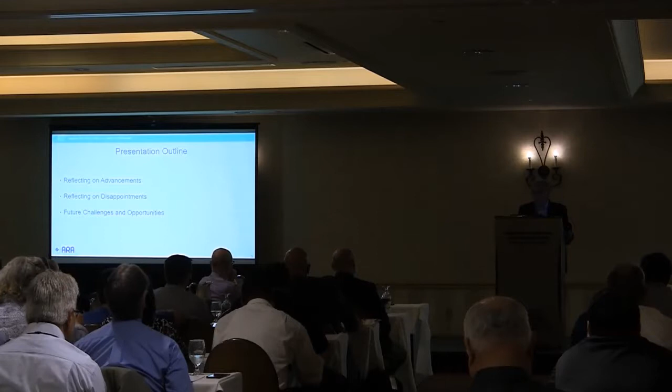I'm going to hit a couple of topics, and Henry has introduced me in previous presentations over some odd 40 years of association. I tend to chastise the profession as we go along here, so I've tried to soften that chastising a bit by referring to it as future challenges. And there's a little bit of disappointment I'll share with you. Don't take it personal, any of you. It's not intended to be personal to this audience or any individual. So we'll talk about my career, and this is my view of the world.

I'm going to reflect on advancements in geotechnical practice. That'll be the bulk of the discussion in my time that's allocated today. I'll talk about some disappointments. You'll see some repetition in that as we go forward, some of the same bullets, because a disappointment presents a challenge to us as a profession, and we can move forward and do much better than we've done in the past, and those that are going to succeed us as we go along.

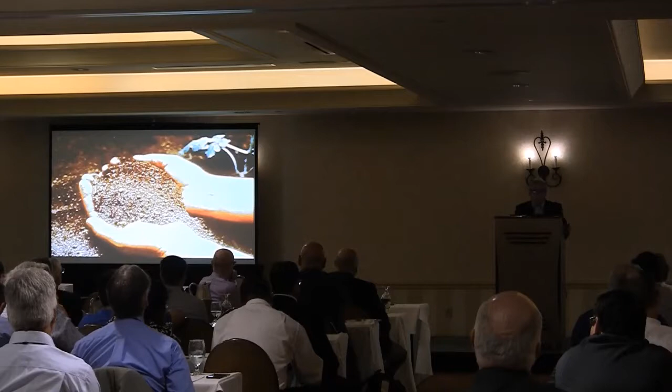In your wildest imagination, when you were growing up, perhaps some of you playing in dirt piles with little trucks and tractors, you probably never imagined that you would dedicate your career to working with geomaterials. Even as you graduated with a master's or a PhD degree, you probably did not fully appreciate that you were dealing with the most complex material on the face of the earth. And when I say material here, I'm referring to intermediate geomaterials, rock and soil. And there are many sub-definitions, as we all know in this audience.

You probably never thought about that. Two things. You never thought about dedicating a large part of your professional life and your personal life to this topic, and you never fully appreciated the complexity of the material that you were going to be dealing with. So as we go along here, we'll talk about some things as I reflect back from when I began working after graduate school in 1973 until the present, things that have changed and things that remain the same.

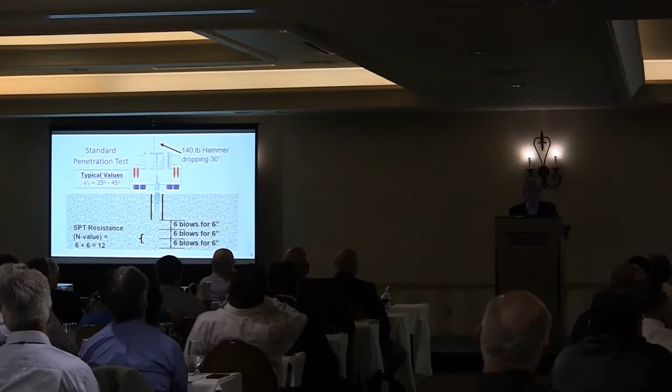If we go back to 1973, the mainstay geotechnical exploration tool was the standard penetration test, and as we well know, the standard penetration test is still well embedded into every geotechnical exploration that we undertake. Now, is that good or bad? I think as long as we fully appreciate, and in some cases, I have to admit, we don't, the limitations and the benefits of this tool, that's just fine. Of course, some things have come a long way that help us further investigate the underground.

Now, what's the negative side of this? I think often I catch myself, and I'm still quite active. I work usually, I'm told, about 70 hours a week, and my wife Barbara can attest to that. So I'm going to cut my time to 3/4 time, and our CEO and Board of Directors group told me that means I'm not going to work on Sunday afternoons anymore.

What I see in terms of in situ testing is I think we've forgotten that all of these tools have to be indexed to fundamental soil and rock mechanics, depending on the tool that we're talking about. And we sometimes see on projects, unfortunately, that these great tools are misinterpreted as being foundational tools. And I mean foundational not in the sense of a structural foundation.

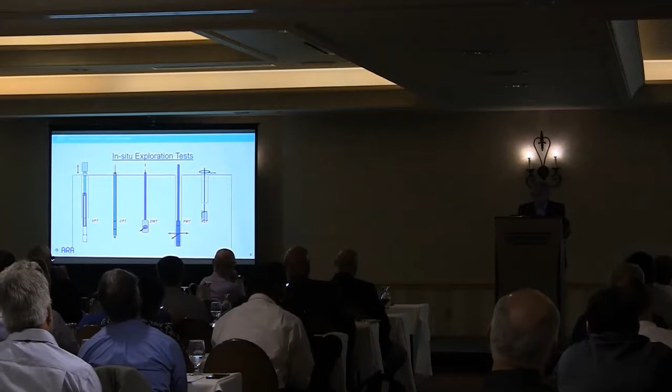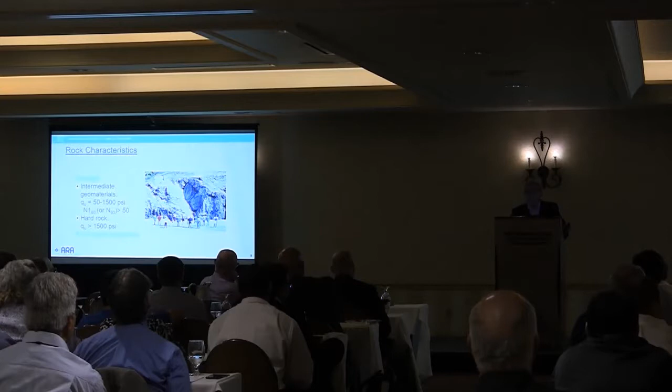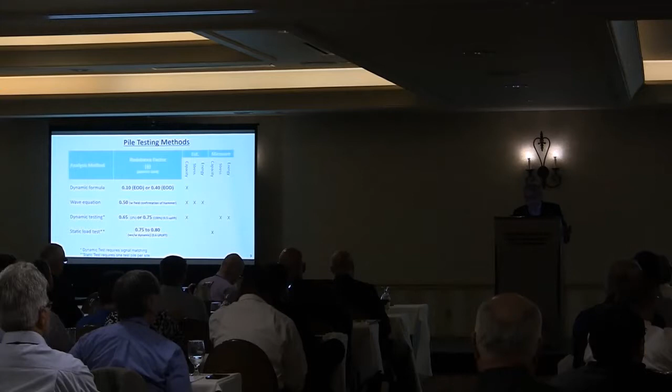In historical practice in civil engineering dating back hundreds of years, the focus of our designs was based on strength-based design of civil engineering features. It took us quite a while, if you think back to hundreds of years ago, and the evolution of beginning to have a conversation with our counterparts, the structural engineers, to speak intelligently about tolerable deformations, both in terms of horizontal and vertical elements.

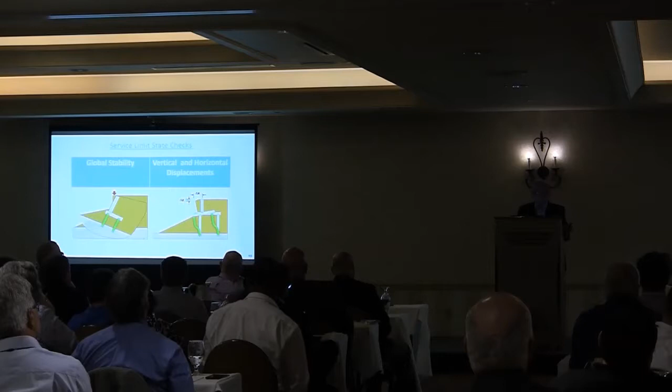So no longer today, some of you do not deal in the highway business per se, at least exclusively. Now today, using the AASHTO LRFD code, we can have an intelligent conversation, and in fact a very necessary conversation with our counterparts in the structural discipline, and say that some deformation, even on a deep foundation, is in fact necessary and appropriate so long as it's held to appropriate boundaries and the performance criteria of the particular feature that we're dealing with.

What has changed? So I'm kind of jumping topics here. If you're with me, you get the drift of this. What has changed? This is a Kentucky bridge. This is one of the Kentucky Lake bridges, which obviously no longer exists. This is one of the main spans.

Fortunately for the cabinet, and I had the luxury of being on one of the teams working on the new bridges, Kentucky Lake and Lake Barkley, the purpose of this slide, in terms of the emphasis that we now have to deal with, either by climate change or by whatever definition you choose, is the demands on our foundations for infrastructure features. By the way, I want you to remember, the only infrastructure feature that doesn't have a foundation is a boat. So anything we build has a foundation. We should be very proud of that as the geotechnical community.

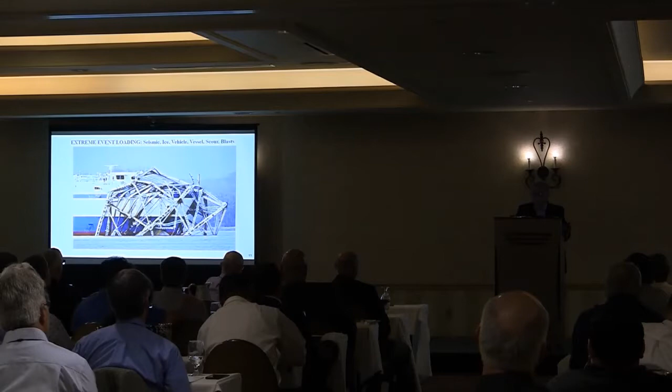Extreme events, for those of you who haven't dealt with this, can eat our lunch relative to controlling the foundation demands on a project. Some of you may be familiar with the Tappan Zee Bridge in upstate New York. Engineers estimate approximately a $4 billion bridge, one bridge, with $1 billion in the structural foundations, 25% of the total cost of the structure.

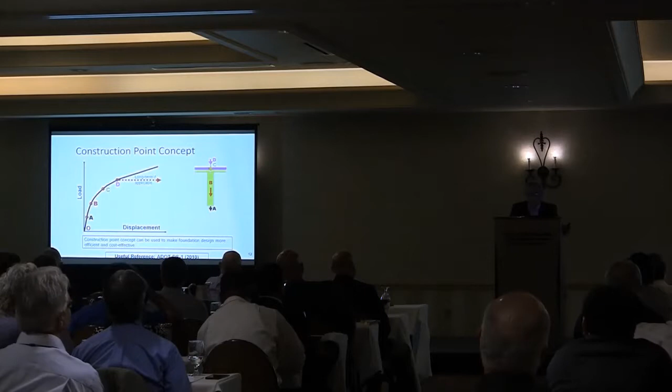Construction point concept. This might be a bit unfamiliar to you, and it's tied to the serviceability designs that I spoke about a little bit before. When we engage in conversations and do our computations from a geotechnical point of view for prediction of horizontal and vertical deformations and the associated times, it's important that we converse with the structural specialist, either on the building side or on the horizontal side of the business, the bridge side, and discuss the development of the deformations as the load is applied.

You see my little cartoon on the right here is a bridge pier, and the concept of this slide is when we have a discussion related to tolerable deformations, we should be speaking about what is acceptable from a post-construction performance criteria and not the total load that's applied to the foundation. In the case of a pier such as you see here, I don't really care what happens until I put load D on. And then I should engage in that conversation with the bridge specialist and say, what can we accept, 1 inch, 3/4 of an inch?

And oh, by the way, please, bridge engineer, don't tell me the Ballantine sign of 0 deformation. You old people know that Ballantine was not a scotch, it was a beer in New York City.

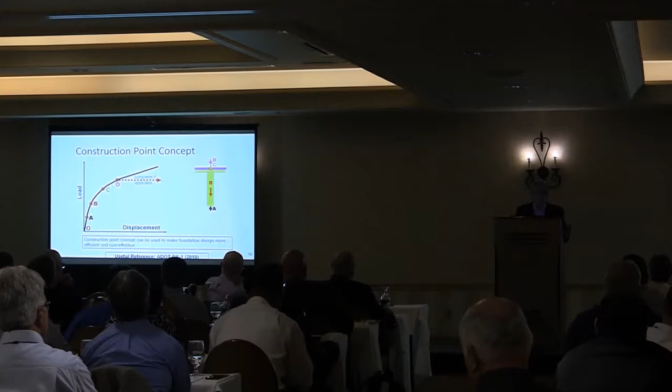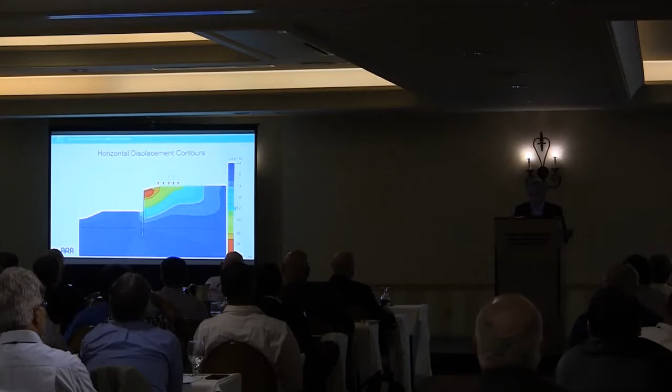Our computational methods have advanced tremendously. They even look pretty, such as this finite element analysis that's there just for eye candy. But a word of caution to the younger specialists that graduate with either an MS or a PhD degree: we must not forget that we have to be able to run some reality analysis, perhaps on the back of a cocktail napkin or back of a coaster. That's imperative. I can't tell you how many times, and maybe it's growing up through the hand computational method phase, I could look at a computer analysis and say, something does not look right, off the cuff.

And I'll do some quick and dirty analysis, and believe me, I'm a Brooklyn guy who grew up in a blue-collar truck driving family, and I ain't very smart. So I must have learned something in 46 years. Balance computational methods that are simple with sophisticated, beautiful analyses that look like this. That's the message. We've come a long way, baby, with this stuff, but let's not forget our roots, or roots, whatever you like.

Okay, so another topic. Just like Rodney Dangerfield, the great Jewish comedian, often said, I don't get any respect. Well, in the early 1980s, retaining walls were not on anybody's radar screen to the extent that they are today. So this is, I believe, still the tallest mechanically stabilized earth structure in the United States, Seattle-Tacoma Airport. I've not been involved with all of these photos that I'm showing you, but every time we turn around, we see a retaining structure.

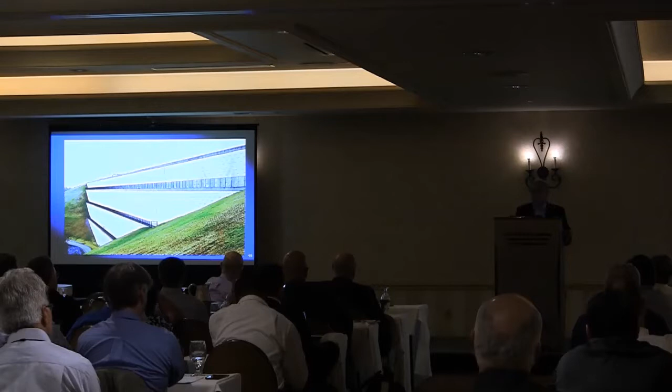So sincerely, we might have a major interchange on one of our national highway systems, such as the project that was just discussed. You look at a major project like that, it is not an inconceivable thought that you might have in excess of 1 million square feet of retaining wall on that single project. I-395, 495, 95 in Northern Virginia has 1.25 million square feet of retaining wall, one single interchange. So retaining walls have gained respect.

There are also many different types. We won't get into that. We don't have time for that. Project up in Cleveland, Ohio. I did work on this project.

And the message here is that our materials have changed. On this particular project, and I apologize if the white is washed out in the upper right here, but the message here is we have moved to higher strength materials, and this is steel piling, of course, but I'm talking about allowable stresses on timber. We can't change timber that's made by God above, right? It's not a man-made product like steel or cement or concrete, but we've made enhancements in terms of allowable stresses we apply. In the case of steel and concrete, we've enhanced their strength.

When I got out of graduate school, steel pilings were A36 steel. We didn't have the advancements in load testing that we have now. And a design stress on a steel H-pile would be 3 to 4 KSI out of A36 steel. By any stretch of the imagination today, if you saw such a design stress in those sections, you would think those designers were insane. This is 80 KSI steel on an H section. And we could go on and talk about using 8,000, 9,000 PSI concrete for precasting on piling. Some special things that we have to look at when we use these higher strength materials.

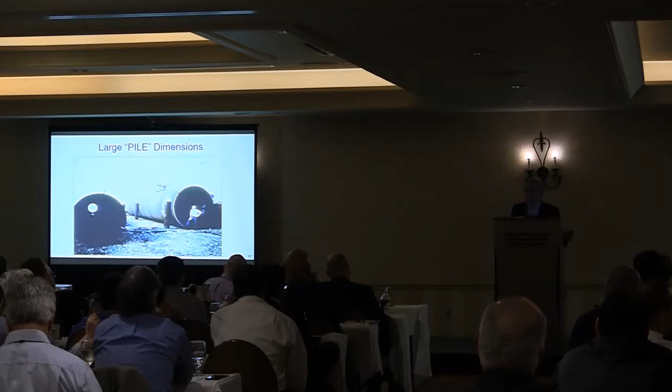Back 45 years ago, these were things that did not exist. And those of you who are new to the practice, you just can't fully appreciate, because we're all dated and biased by the time that we entered our careers, things that have changed over a period of time. Things are constantly changing, that's why we're not as aware of it as we might think we need to be.

So certainly, to the message here, we should no longer, thanks to the tools that we have today, have these kinds of problems that were chronic in the 50s, the 60s, the 70s, until these tools were mainstreamed into practice.

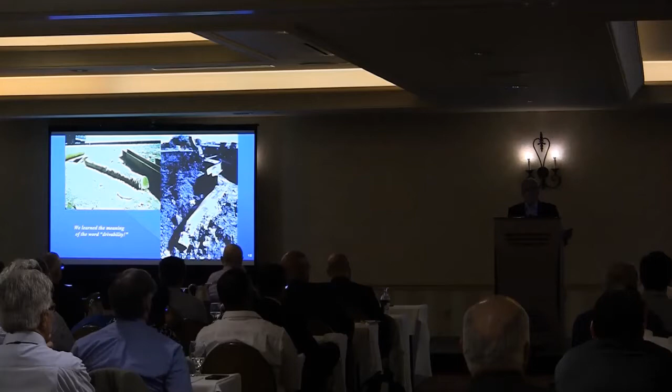Drill shafts certainly had a long history before they became mainstreamed into practice. And in my career, the linchpin for the federal government in terms of becoming more interested in drill shaft research, which is still going on, and Silas will speak about that later today, was the collapse of the Schoharie Creek Bridge in New York State on the Thruway. That occurred in the 80s. And that led us to better appreciate the importance of the foundation, and it reestablished, perhaps excessively, the focus that we have on scour analysis related to our structures.

Because we had no confidence at that time in the skin friction resistance of what a shaft could provide to us, both in soil and in rock. Now, by today's knowledge base, the amount of information we've accumulated over 45 years, we very confidently and very routinely will design straight-sided shafts, in many cases where they're totally designed for skin friction without the contribution of end bearing, for a variety of reasons.

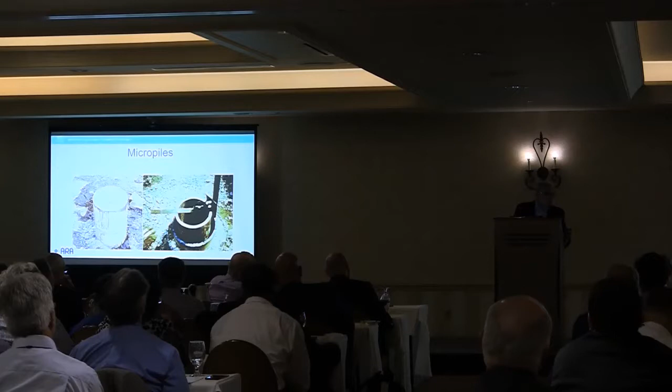I had the opportunity to work on the first micropile project that was associated with the highway industry, out in California. That was dating back to 1976, right when I had joined FHWA. And we looked at this. Back in those days, we would import a lot of technology, as we do today, from Europe and also from the Far East. And we looked with skepticism at micropiles because it was something new. We're engineers and we're naturally conservative, but nowadays we talk of it as if it's a household word. So that's the message I keep going to. Things have changed quite a bit.

Flashback to the 1970s, our knowledge in terms of pile hammers as engineers was pretty puny. And the state of practice back then was there can never be anything that goes wrong with the hammer. The ram goes up, the ram falls down, I count the blow, the ram goes up, the ram goes down. We all know through measurements of the pile driving analyzer, through wave equation analysis today, there are many things that can go wrong with driven pile hammers. The biggest challenge today for us as well as the contractors is to select the best tool for the project so everybody's happy. And of course, we don't want any new photographs of damaged piling. More blows ain't better.

So not to shortchange the drill side of the house, we've got oscillators, rotators, we've got a vacuum cleaner, extraction tools, all kinds of wonderful equipment that didn't exist 40, 45 years ago that allow us to do the things that we do today. I would not, in my wildest dreams, imagine that I'd work on a drill shaft that was 300 foot deep of that diameter 40-some-odd years ago. And even if you designed it and you could build it, how in the world would you ever load test it? How would you provide your client confidence that elements of such a size and such a load carrying capacity would be able to sustain the design loads that are applied?

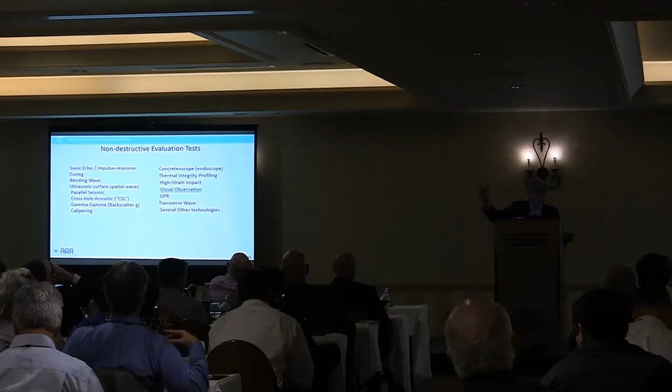Now, what's changed? When I was in graduate school, I took 2 geophysical courses, which is kind of unusual. For a geotechnical engineer, I actually took 6 geology courses, undergraduate and graduate, but back in those days, the fundamental models are still the models that we use today. But what's changed as you look at this list and look at all the tools, the algorithms have changed, the sensors have changed, the data collection efficiency and analysis has changed, and oh, by the way, the engineers who are using them have also gotten a lot more astute in interpreting the raw data. So we've got lots of tools that we can evaluate. Load testing in the previous slide, and then in this slide, we're concerned about integrity because we're not Superman or Supergirl, and we can't see below the surface.

If we look at geosynthetics, 1957 was a sideline outlet, a woven monofilament that was used as a 1957 Chevy seat cover, was introduced in the early applications of geosynthetics as an outlet for an excess supply in a warehouse. In the early 1970s, that was followed by the introduction of a product called Bidim that was introduced by Monsanto into the United States from France, and that was pretty much the introduction of non-woven materials. There was a needle punch non-woven, so we had a non-woven, we had a woven.

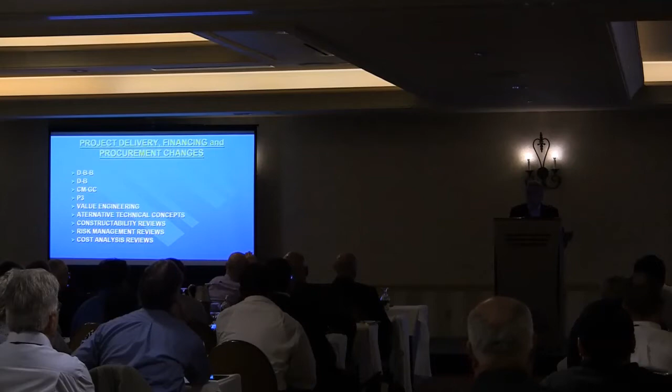Those of you in consultant practice, and because I'm old and I'm getting bald, people think I know something, so I do more dispute resolution work than I've ever done before. And I find that the geotechnical designer, or the designers on these schemes, really, in my opinion at least, absorb more risk. It's not a fair allocation of risk. So be very cautious if you're well versed in design bid build, and then you're moving over to these other methods.

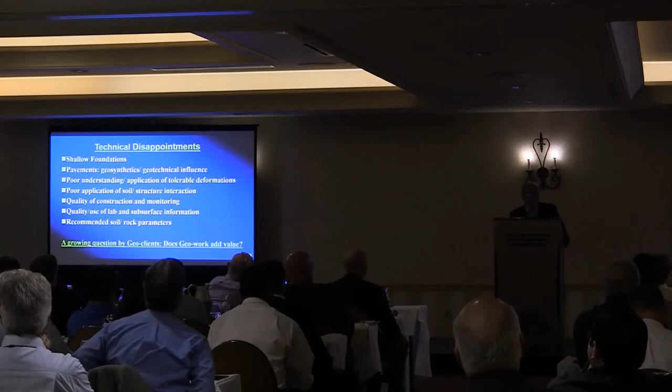Some professional disappointments. There's a growing number of people in the business, and I'm aging myself, but I think younger people view engineering as a job rather than a profession. If you're blessed with good health and you like the field that you're in, you're going to work at this for about 50 years, or if I look at my good friend Henry here, perhaps longer. It's a profession, and you've got to be concerned and contribute to your profession.

If you want a job, I can get you a job with my brothers-in-law. They're out on work release driving a truck.

I don't think we really fully embrace this concept of a holistic view of geotechnical involvement on a project.